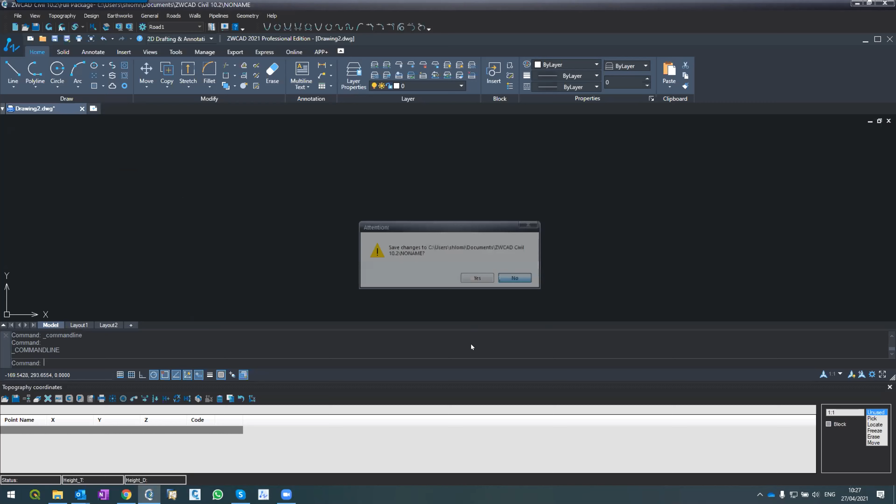And what we did, we started with a new project. Then in documents, we went into ZWCAD Civil 10, into samples, then to sample 7. Sorry, okay, new project, we opened a new project, it's my mistake. I opened a new folder and I'll call it Roads Design 2, and inside the folder I opened the project. Then we have our own project.

We've loaded a coordinates file. We do it here on the lower left button, we load the file of coordinates. What I did, I went into ZWCAD Civil 10, which sits in your documents, go to samples, go into sample 7, and read the file named sample 7 TCO, which is a coordinate file. Now I've gotten it here in the list. To see it, I press the refresh button, it's here on the top left. And I've gotten my map.

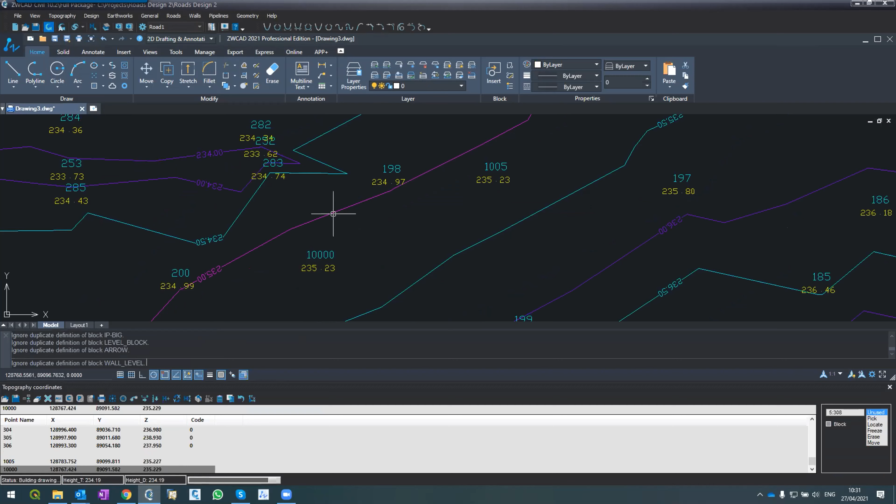Any question so far? I think this is quite simple. Let me continue. Now please bear with me.

Okay, it goes to roads. Every road starts with the horizontal alignment. It means the layout, how the road goes, the alignment of the road. All of us know that the best road is a straight line connecting point A to point B. So for example, if I want to create a road that goes from this point to this point.

Let me open a new layer and call it center line. It can have any name you want - I chose center line because center line usually refers to the center of the road, what describes the center of the road. I'll give it a color, red, or yellow, and make it the current layer.

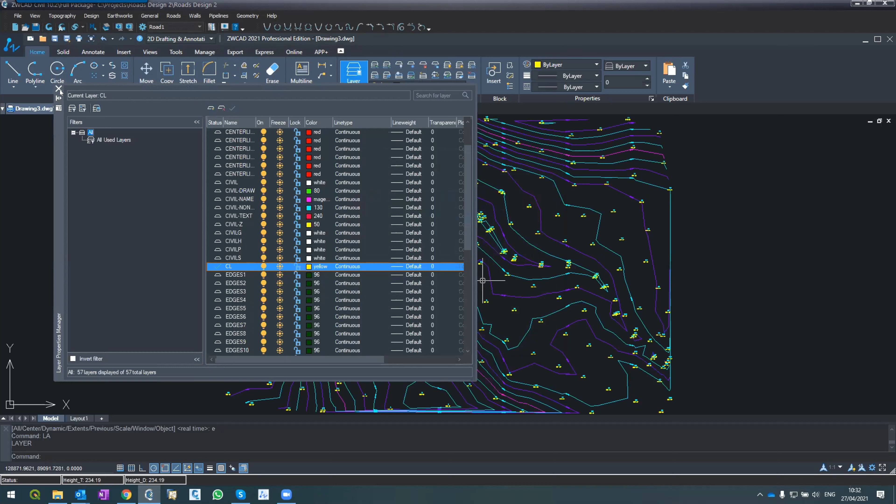If I want to connect this point to this point, I can do a straight line, right? So how do I do it? I do a polyline, standard polyline in AutoCAD or ZWCAD, from here to here. Obviously if I want to connect these two sides, this is the best road because it's the fastest.

But maybe Jimmy, can you tell me what is the problem with this road? Why shouldn't I go this way? Or what can be the problem with such a road? Any idea, Jimmy? No idea. Anyone else? Probably the cut and fill. Exactly, thank you very much.

Who was it, Nilo? Yeah, Nilo. Yes, thank you Nilo. Exactly, this is the problem. Because if I go straight like this, remember this is only the center line - the road will go wider, like 5 meters here plus 3.5 meters like this and 1.5 meters.

And then I will start cut and fill here. You see, there are contour lines here, there's a small hill here, and that's a problem. Now it depends - we can still go by this road, but then it means we are cutting here, or I can change my road and do another one.

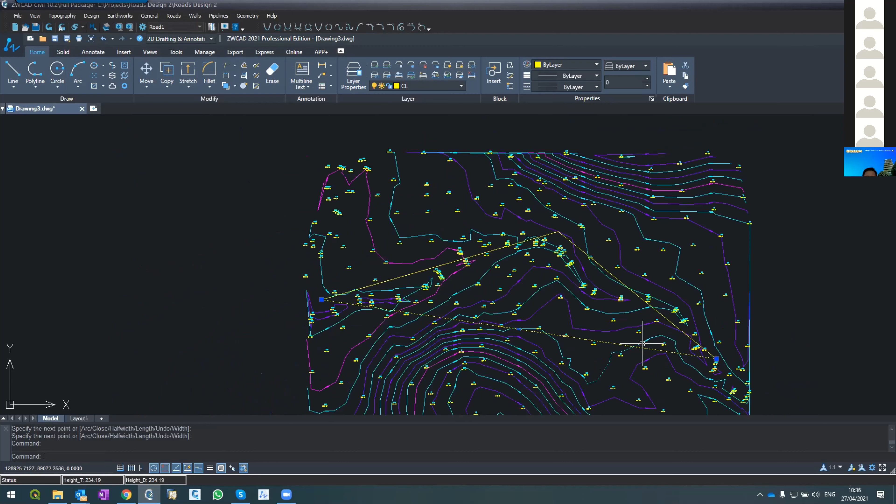If I want to drain to this direction, I will have a problem. I will have to put some kind of side ditch here, which is the solution. So drainage can affect our road design - definitely we want to go from high places to low places or whatever.

Another thing is a structure - let's say a house or plot. Let's create a plot, okay, just for an example. Let's make it white.

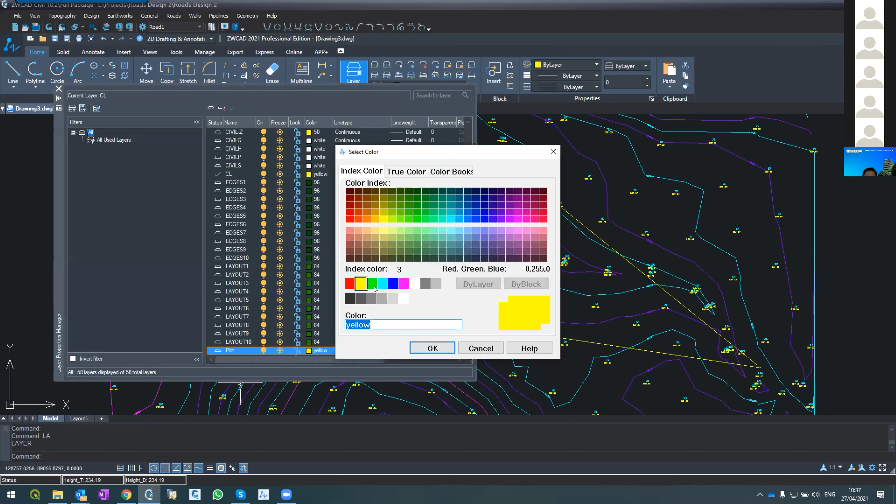I want to go in a straight line, but there is a house here, and another, not house, plots of private people here. So if I go through their plot, the owners will not allow me, or they will ask for big compensation.

Usually in many countries, the law does not allow owners to prevent roads going through their location, depending on physical planning. But if you go through a private property, you have to pay compensation, and the government pays it. This makes the project more expensive, and affects what we call statutory design. We have to redesign and come to a settlement with the owners, but we are going through their plots, and this can affect the alignment.

So I'm just giving you several examples of what can affect our road alignment. We talked about natural behavior, like earthworks and the effect on the environment. Parks and nature can affect it too - for example, if there's a national park here, they may not allow us to go through it. Private lands, other obstacles, maybe a big monument here that nobody will allow us to move, drainage, and so on and so forth. All this affects our alignment.

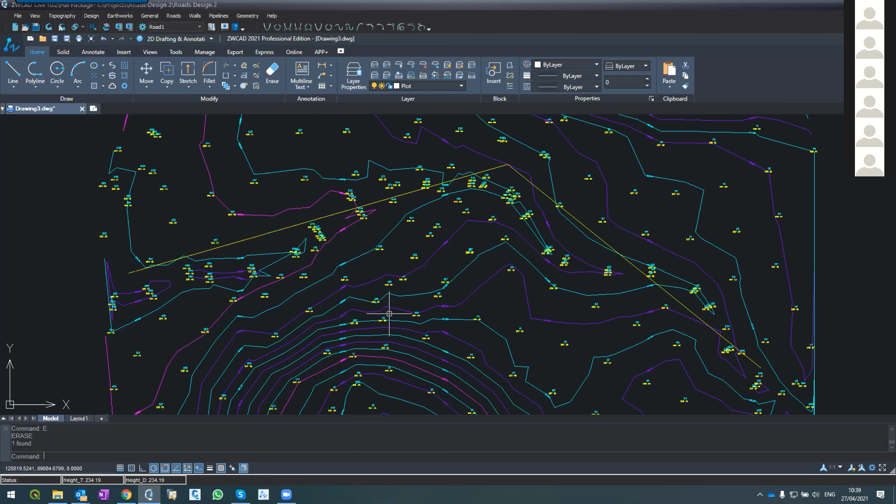So just for our example, let me design my road this way. So what I did, I created a polyline, but for now it's just a simple 2D polyline. To convert it into a road, I'm going to Roads, Horizontal Alignment.

See what happened - first of all, the list here below changed from topography to design. It says design coordinates, and I can flip between them. Go into topography, I see the topography. Go into design, I see the design. So I can flip between topography and design coordinates. On the right hand, I see the horizontal alignment window where I can define my road.

He asked me what is the road, the first road, road 1? I'm picking the select here on the right. See what happened in the command line - enter an option, polyline or segments. We will use polyline because we have a polyline here. So I press enter for the polyline. He asked me to select the object. I select the object - one object found - press enter.

See what happened now - the 3 coordinates that define this road, the first, second, and third, we call them IPs, intersection points. They appear both here, the coordinates, and the description of the road, IP 0, 1, and 2. If I press apply, we'll see the system converted this road, this polyline, into what we call a road element.

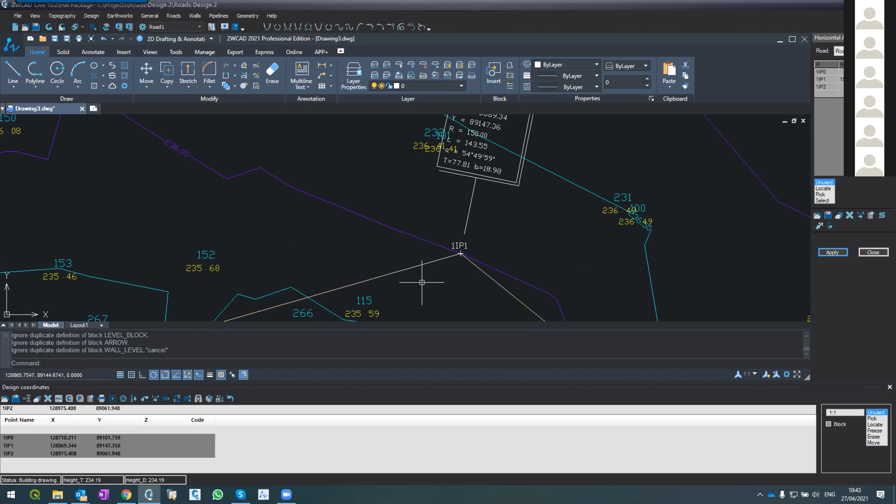See what happened - automatically the system used the 150 meter radius, and changed the road accordingly. So the starting point of the radius, we call it the tangent point - the tangent point between this straight line and this radius. The software calculated it to be here. How? It took the 150 meters, found how to fit it, and came up to this tangent point.

So from here we are starting - if you're driving a car, next time you drive, you'll notice that this is straight, and when you're going into the radius or turning right a little bit, this is the starting point. From here, what will happen? I don't know, Sheena, can you assume what will happen to the car starting from the radius? What will we feel? Any idea?

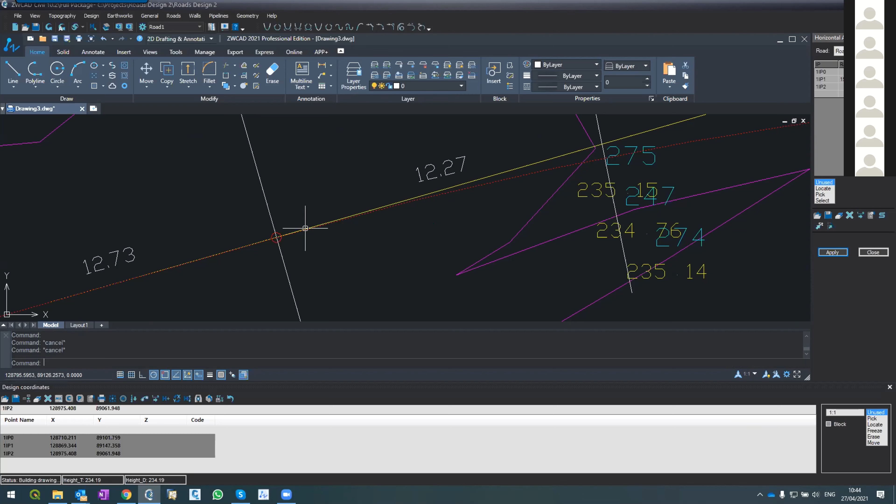Super elevation will be the implication, but what we feel is the centrifugal force - sorry, I said gravity, my mistake, it's centrifugal force. The car will feel it to the left if you're turning right. Centrifugal force pushes the car out of the circle, out of the radius. So if the car drives like this and starts turning right, let me show you something.

Let me do something, okay? This is my car. If this car is driving here, it drives like this, in this direction.

When it starts turning right here, there would be a force which will go this direction, right? It will start feeling the radius. The faster it will go, the bigger the radius. The bigger the radius, the lower the force.

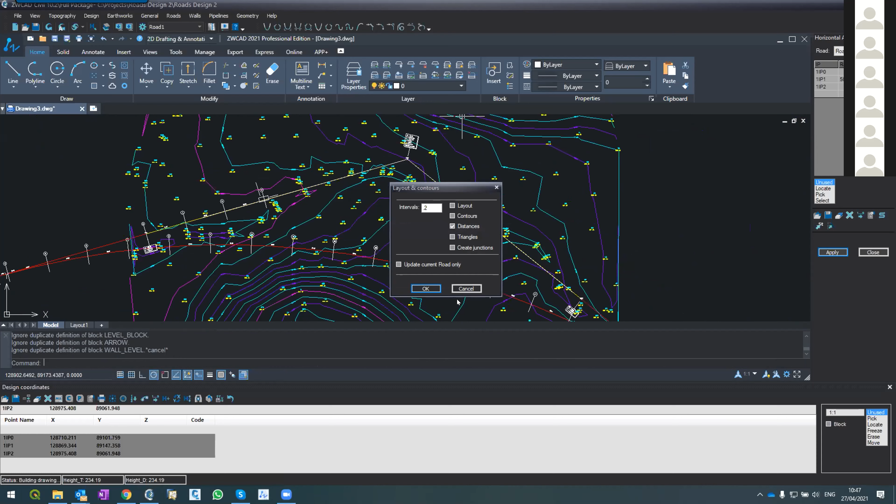On Road 1, there is an overlap. When I do 500 meters, it's too big - there's an overlap between this IP and this IP, and this IP and this IP. You'll see it in a minute. There's no geometric solution, so the system alerts you. See what happens - this is 500 meters, there's an overlap, so we cannot use it.

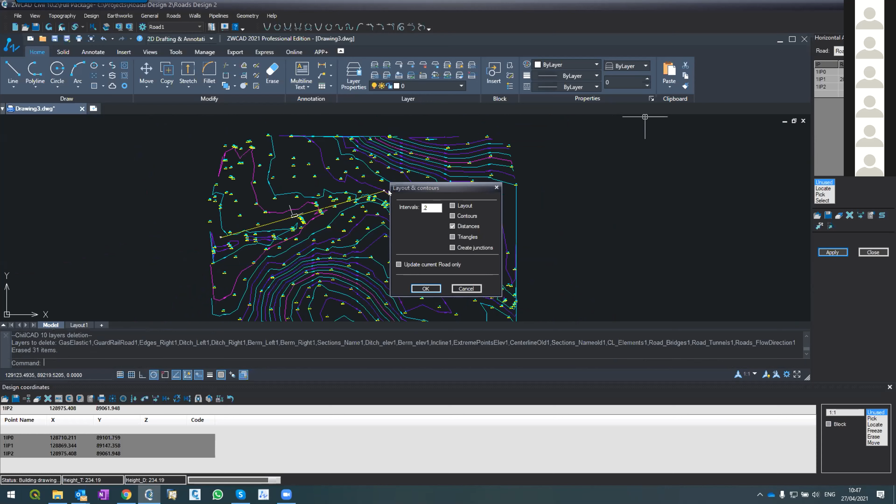So I'll go back to 200 meters. That means with 200 meters, the speed limit here would be maybe 70 kilometers per hour, depending on which standard we use. So I'll use 200. About super elevation, we'll talk about it in this lesson. Super elevation is the way to compensate for the centrifugal force by entering a crossing slope, but we'll see that very soon. I hope what I explained is clear.

So in short, when I click select here, select the polyline and press enter, I converted it into a beam - for now, a beam with horizontal alignment only. That means the data shows here, and that means I can enter a radius and change the radius of the road. This is what it means.

By the way, I have some additional information I can enter here. We call it transition curves, or in other words, clothoids. This is more likely to be shown on highways where the speed is very fast, and therefore a car that will go in this direction at 120 kilometers per hour - at this point, immediately the centrifugal force will be in full force on the car. So the effect on the driver will be fast and strong. So usually we smooth the transition.

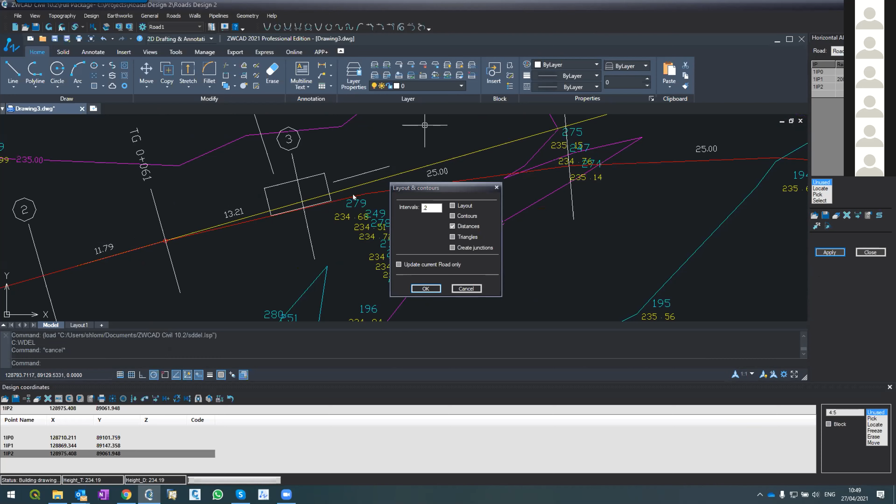For example, I can enter what we call a 40-meter transition here. Let's see if there's a geometric solution for it. Let's see it. Otherwise the software will alert. You see what happened?

Instead of a tangent, we have what we call a transition curve, a transition spiral. This is now not a regular curve, we call it a spiral, also called a clothoid. The clothoid is a geometric solution for a transition between this point and this point. We are transitioning the curve from here to here. What's unique about this element is that the radius here is 0, or infinity if you like - it's the same. So there's no centrifugal force.

Here it starts changing - at each point like this, the radius is getting bigger. Here it will be 200, here it will be 0. And the clothoid's geometric definition is that it transitions slowly, gradually, from 0 to 200. So the driver will feel that the change is not that dramatic. This is why we create transition curves.

I hope you got it. What the software shows you is that the TS is the tangent from here to the spiral, and here from the spiral into the curve. And here again, usually when we do a transition, we do the same when we're going this way, so I'll put 40 here as well and press apply.

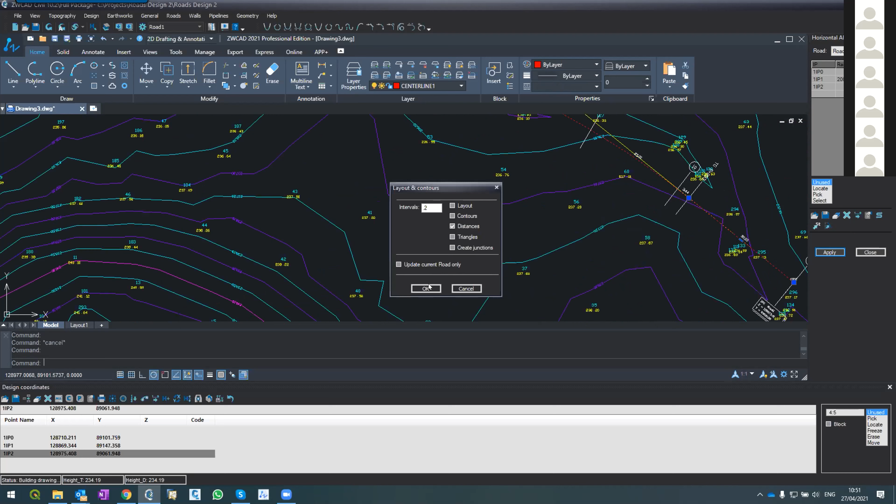Now I'll get the same thing here. Okay, so I have a spiral from here to here. I hope this is clear. Any question about this one?

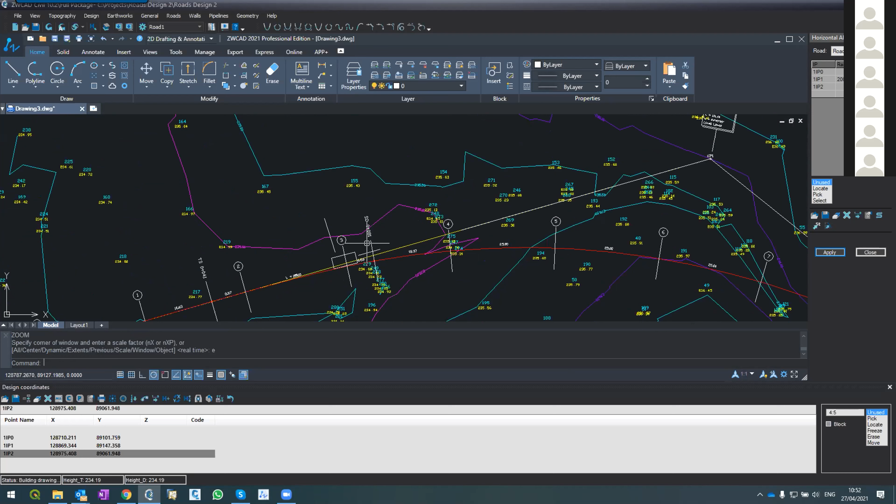Any questions about this one? No questions, I assume the silence means no questions. Nilo, can you follow? Yes. Hatik, can you follow? My question is, can I follow? Hello? Yes, I can follow. Okay, who asked the question? Jimmy? Yes, please, Jimmy.

We can still design our road without a transition curve, right? If we are following just the radius without the transition values. Of course we can, but it has implications.

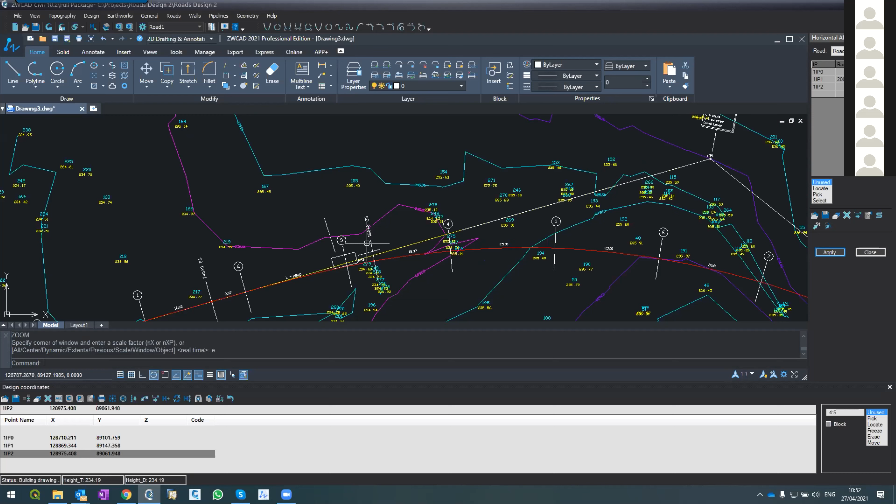Again, it depends on the speed limit on the road. If it's an urban road with slow speed, let's say 80 km/h, then usually we don't use it. It depends, we can use it or not use it. The reasons for not using a transition curve, let me give you some ideas.

One reason is it's more difficult to construct, because the spiral curve itself is not a linear definition. Second, it probably affects our geometry. We talked before about the limitation of the geometry, for example the preference to have a straight line instead of a curve from the first place, so this also limits the geometry.

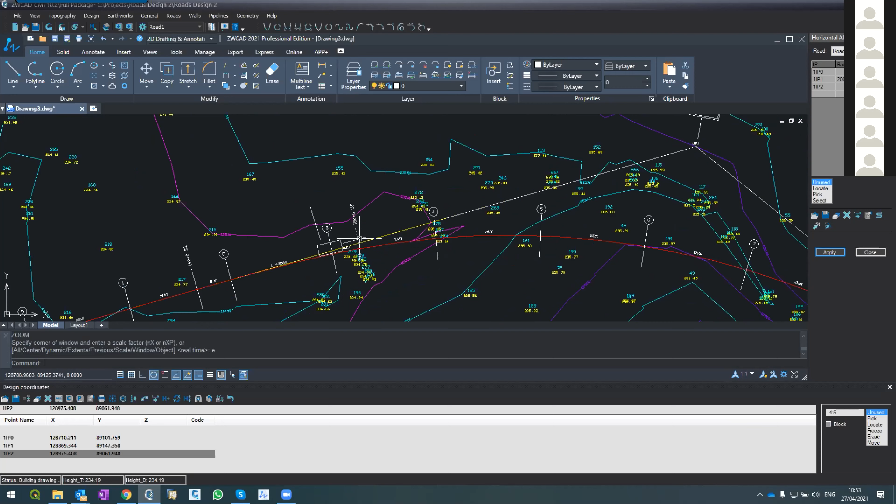So usually these are two reasons, maybe others, that limit us from putting in a transition curve, and then we use standard radius. But in highways where the speed is very fast, and you enter the radius again, for example if this would be a curve on a highway with a speed limit of 120 km/h...

Usually we put a transition curve. But if the radius would be, for example, 5,000, then the centrifugal force on the car will not be that much, so the importance of the transition is not that critical.

But again, I'm talking about road design, and I'm trying to limit myself now to the software and not to general civil engineering. More things about the software.

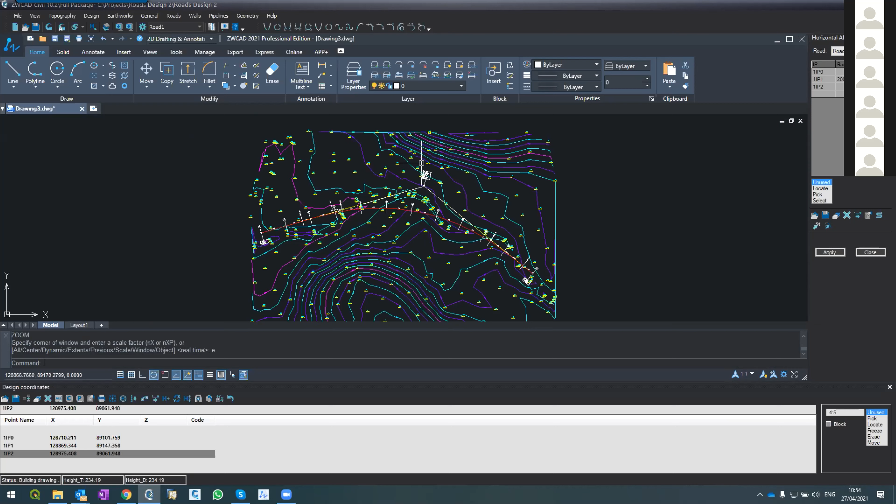Whenever we design the road, the software shows me more data here: the X, Y coordinates, the radius, the length of spiral if I have one. It shows me L, the length, I think from here to the tangent. I think this distance is 150, as far as I remember.

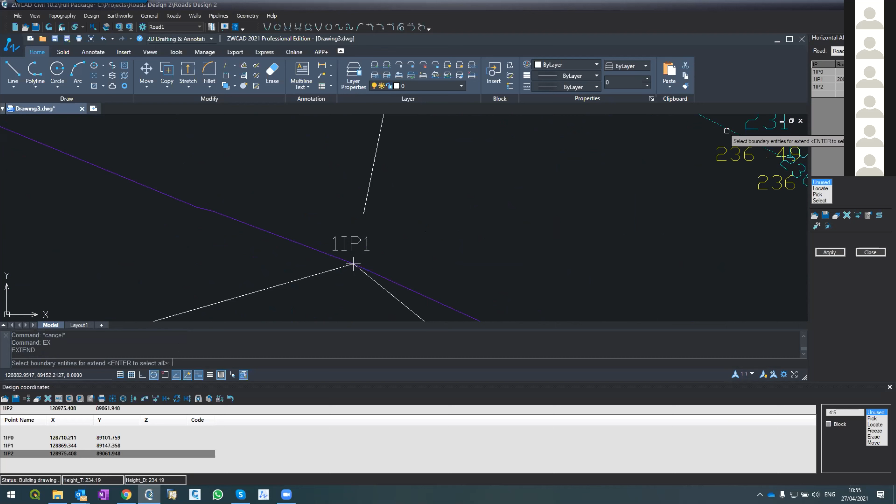And it shows me the transition angle, which is created here. If I would extend this, this is the turning angle. So here the angle is 54 degrees.

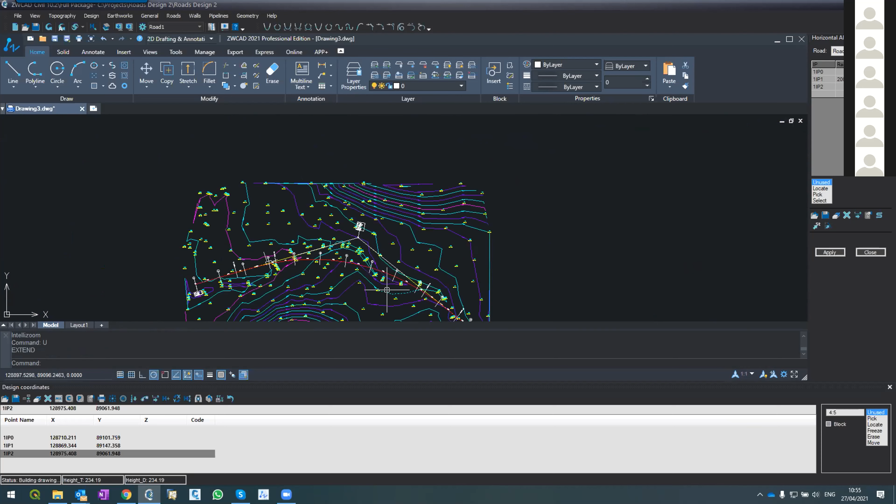These are data for the road. What else? It's too much graphic, let me go into layers and civil settings to simplify, so I don't need the points. If I go to options, I have many definitions here, one of which is to change the display.

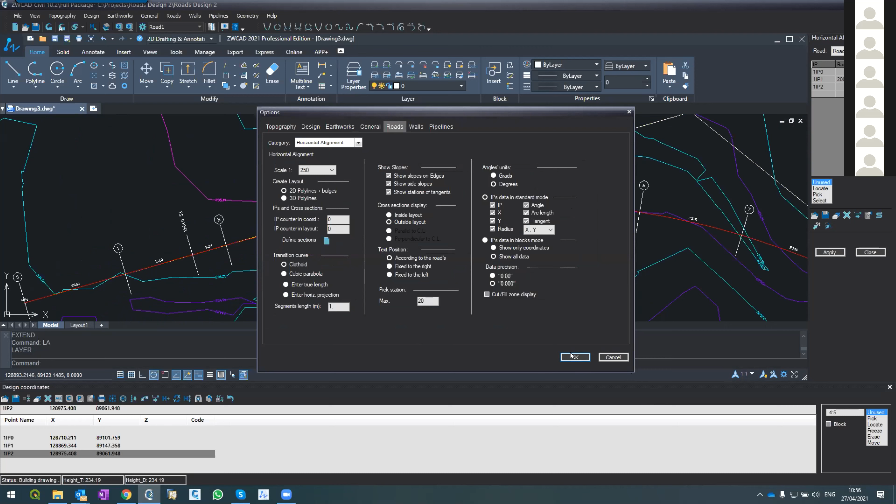Instead of having the road shown as 0, 1, 2, 3, 4, if I go to define sections and change the format from format 1 to format 2, press OK, OK again, and apply, you can see that now, instead of numbers, I see the running distance of the cross section: 50, 75, 100, 125, and so on. It's a matter of how you want to display it, there's no one standard for it.

How do you want to create this road, the center line, as a 2D polyline with bulges like we saw, or a 3D polyline? There are advantages to both: 2D elements are easier to cut, trim, and edit, but a 3D polyline will show me the road in 3D if we change it, so you can choose.

Remember the transition, now we're using clothoid. We can also enter cubic parabola. Why use cubic parabola depends on countries and regulations and so on. There are many options, I'm not going to talk about all of them, but it's important to know they exist.

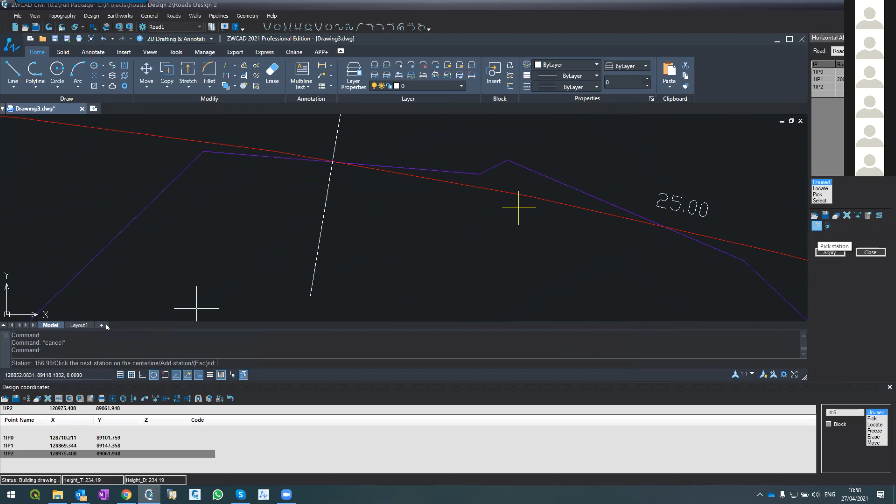Another thing, for example, this button. I can click this button and click here, and the software shows me that this point, the projection or perpendicular point on the road, is at a running distance of 156.99 from the beginning of the road. So if I want to measure the running distance at a specific point, I can do that.

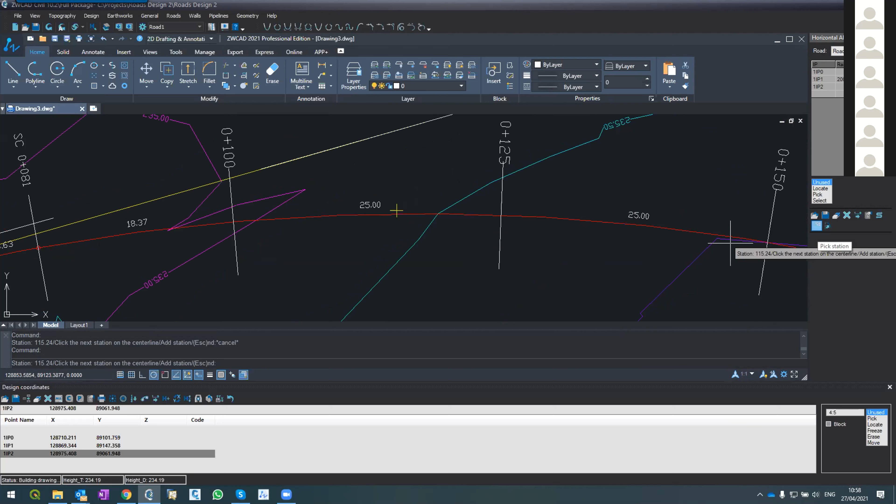Click here, this is 115. You see, this is 100, this is 125, this is 115.24. So I have many tricks here, though it's not that important at this stage.

If I take the original polyline, the CL, and change it, nothing will happen because the system doesn't know unless I reselect. Let me go select, enter, and select this. But see what happened? All the rest definition changed, so I'll have to re-enter them.

What was it, 200 and 40 and 40.

Oh, you see what happened? Since the curve is bigger, there's an overlap. The 200 cannot fit. So let's do a transition, maybe 20 meters, just for... you know what, not transition. Let's see what happens now.

Still 7 meter transition. So I'll use this to set 180. Yeah, now it's okay.

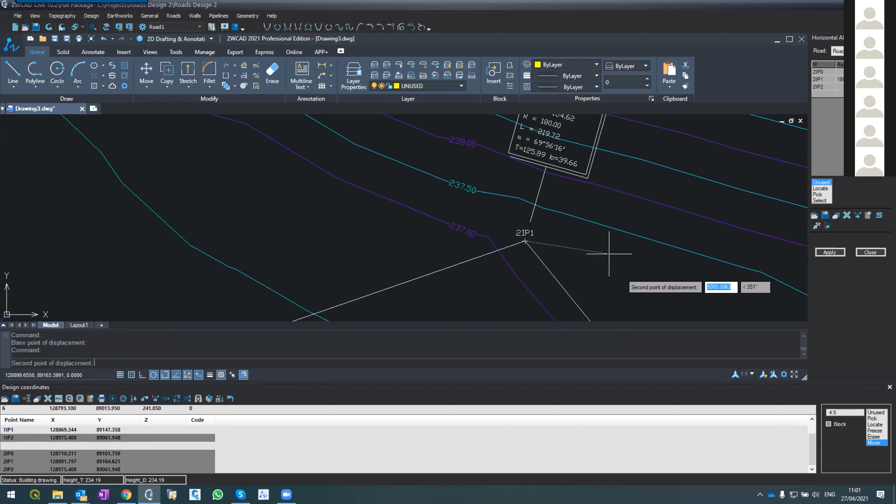The software asks, what is the base point of displacement? I said from this point. And what do you want to move to? Let me move here, can use object snap, whatever, but let me just move it here. See what happened.

The software now thinks, one second, and recalculates... one IP, sorry, recalculates these IP coordinates. These IP coordinates change to this location.

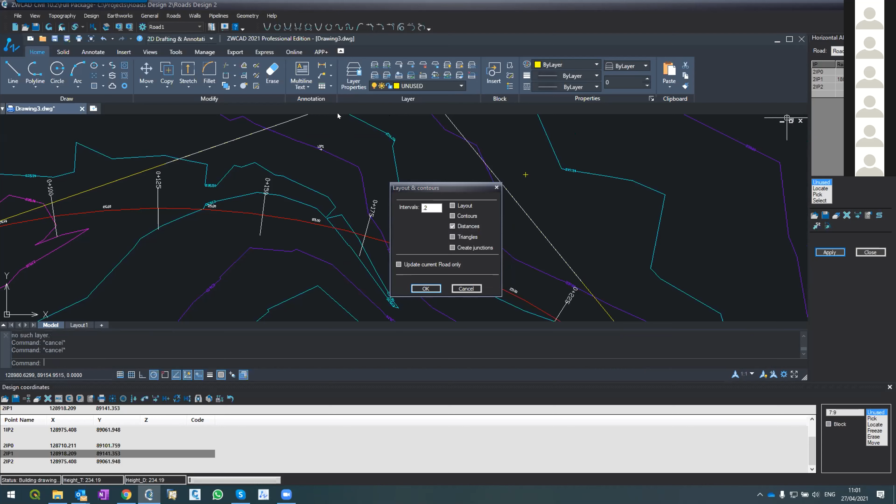If I go to the right and press apply, and apply again, automatically the beam has been updated. But again, we have the radius, the overlap problem, because this new geometry created new challenges. We'll fix it in a minute, but just so you can see.

See what happened? I changed it to here. I don't need this polyline anymore. Now I'm using move to change the coordinates here, and the beam automatically updated accordingly. See? This is the overlap which we saw.

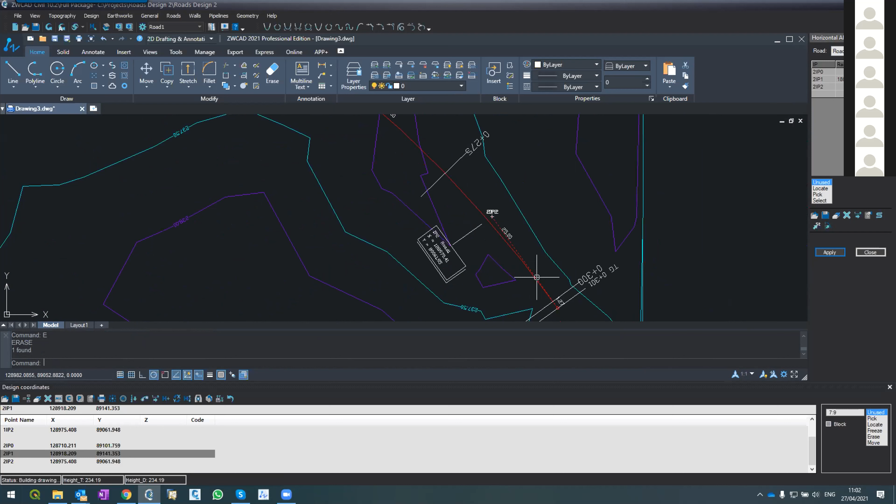So let's change it now to 150, maybe it will be enough. Let's see, actually the software will tell me. Yeah, it's enough.

Okay, any questions so far? Any questions so far, guys? Because I finished with horizontal alignment and I'm moving to the next thing. Sheena, can you follow? Yes. Don't you have any question? No questions. Okay, okay.

Before I continue, I want all of you to take like 10 minutes and do the same practice. It's very simple, what I want you to do I will write down in the chat. So all of you: one, start a new project and name it road 2. You can put it in a folder, put it in a new folder.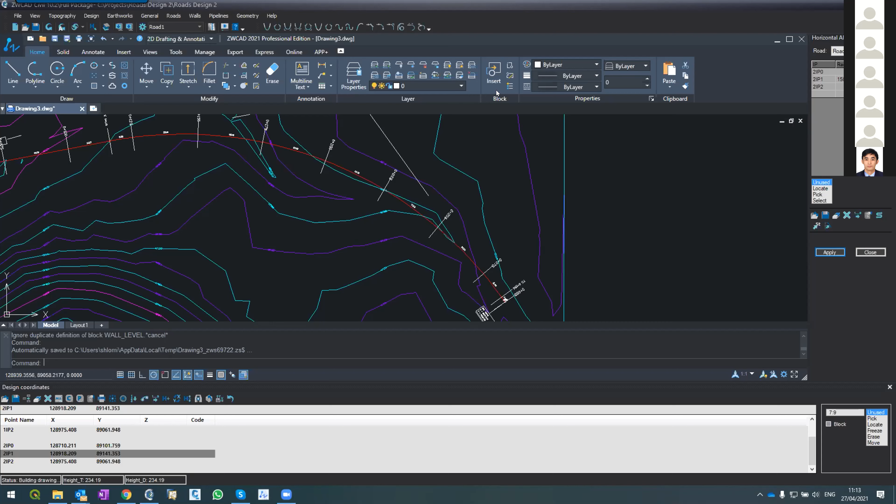Yes, I have a problem, I don't know the course. Let me share my screen. Because all of us should learn, I want to see it easy on my screen because I'm doing it perfectly.

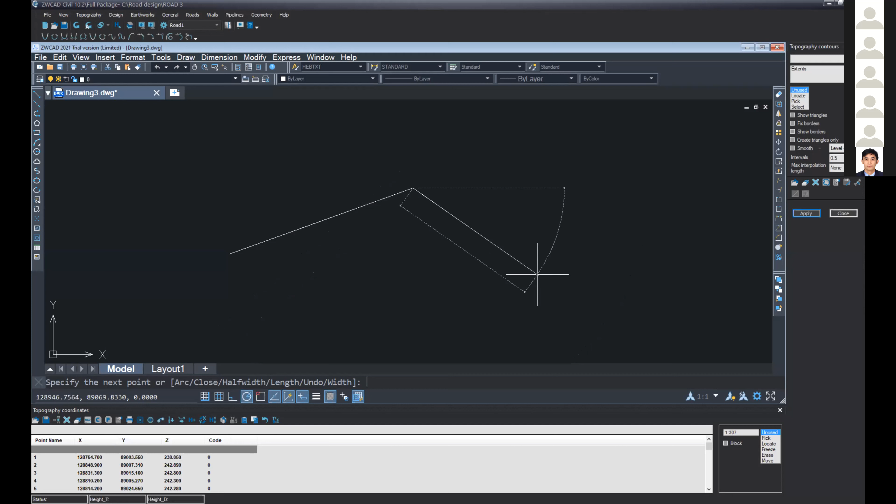Where is your contour line? Where are your contours, the contour lines? How to draw the polyline, the road, then it disappears.

Can you? Okay, one second. Somehow your point disappeared. The contour lines, the contour lines. What about your points? Yes, everything.

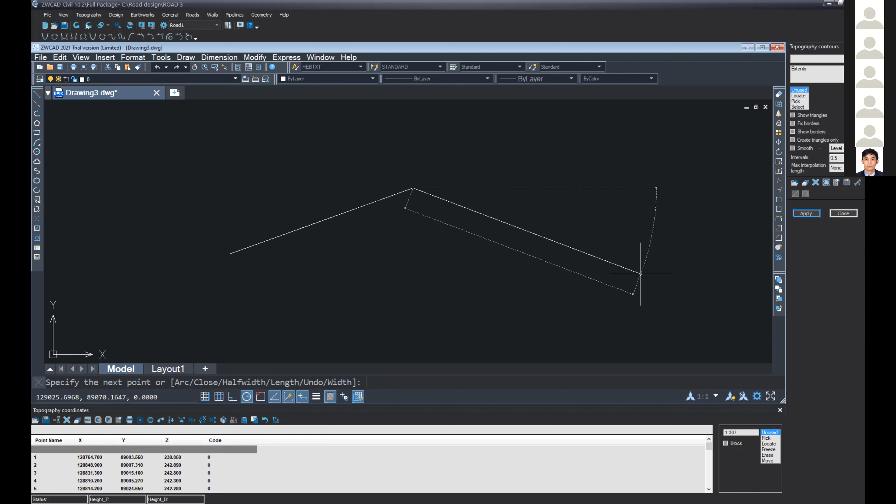Okay, let's do like this. Press escape, go to one of the points below, click on it. Now go to the first one, you see that the point is now in the editing row, the point itself. Yes, above is the editing row. No, below? Yes, okay.

Go to the end and enter a space, or go to the one and change it, remove the one, and do something to show the system that you have done a change. Remove one and enter one again. I've done that, and enter one again. What you did right now, if you refresh, the system will think there is a change and refresh the layer. Oh, the contour line is back.

Okay, one second, there's a delay, we don't see. Okay, you see what happened? So I don't know why they disappeared, but if you want to make the system refresh or recreate the layer, if you just press refresh, the system will not know you have a problem. So you have to tell the software you changed something in the list, then refresh, and automatically the system knows there is a change in the list. I need to recreate the layers.

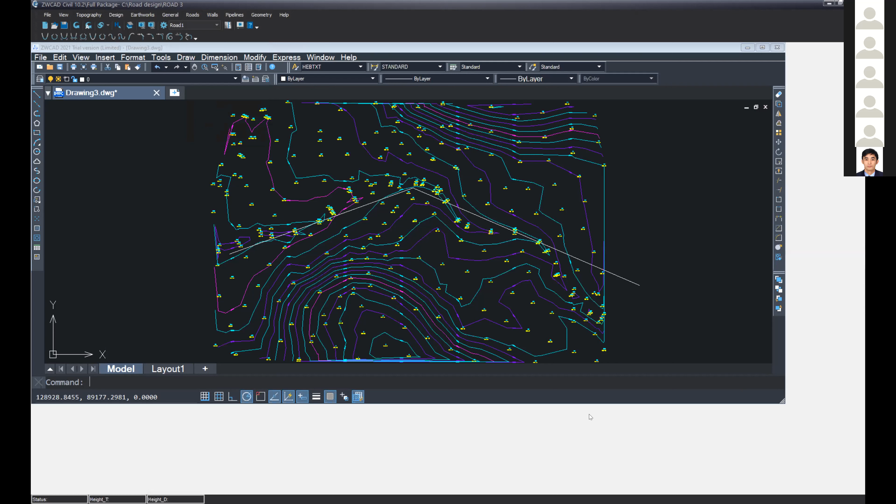Yes, Atike, can you share your screen? Atike, can you share your screen? Better not, because my ZWCAD Civil has locked, so everything is gone. Can you show me? I want to see. Okay, and say locked, we try to understand what's going on.

Maybe we'll learn together. Sorry. Can you see now, can you see my screen? Yes, I have already imported the coordinates now.

Good, continue, I'm at that position. But I can't see now. Okay, you see, you have the same problem. Yeah, first of all try to zoom extend. In the command line, zoom to extend. Command line, zoom to extend. You know how to zoom to extend, right? Zoom, yes, enter, E, enter.

E. Excellent, yes, it's Turkish, you know. Turkish, yeah. Just zoom to extend, maybe do it from the buttons, whatever you want.

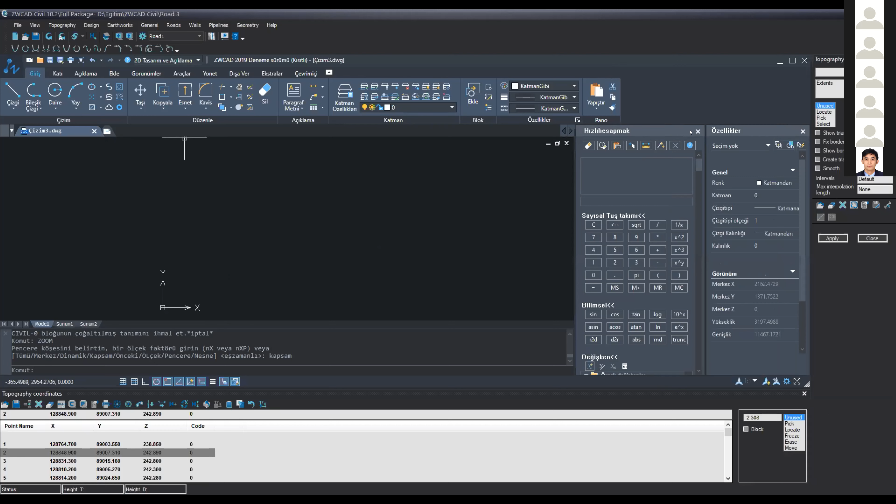Okay, no? Perfect, done. So nothing on your points, very strange, very strange. You know what you can do? Maybe I can go to number 2, for example, in the list below. Yeah, and you see you have a button with a target that shows a target. This one, yes. This is where the point was supposed to be, but it's not showing.

Okay, try to create contours, let's see what will happen now. And at that point, it's locked. I see, okay. This is one of the things that maybe we'll ask our technical team to have a look, because I think it has something to do with the language, I'm almost sure.

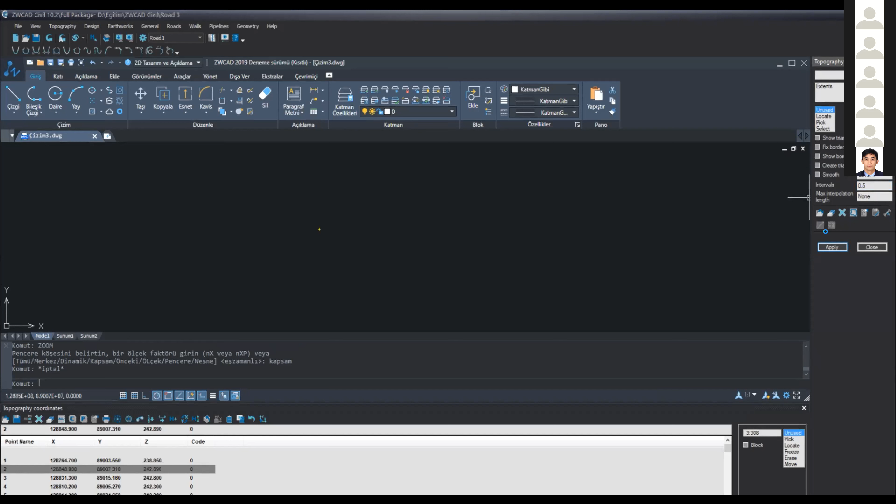It's conflicting with the language, so it's something we can sort out, but we need to take control, maybe later on. Okay, yeah, okay, we can take it later. This is the first time it's happening, or has it happened to you in the past as well? Yes, in the past I have the same issue lots of times. Okay, okay, it's an issue of the Turkish version, so we'll have a look and sort it out. Okay? Okay, thanks.

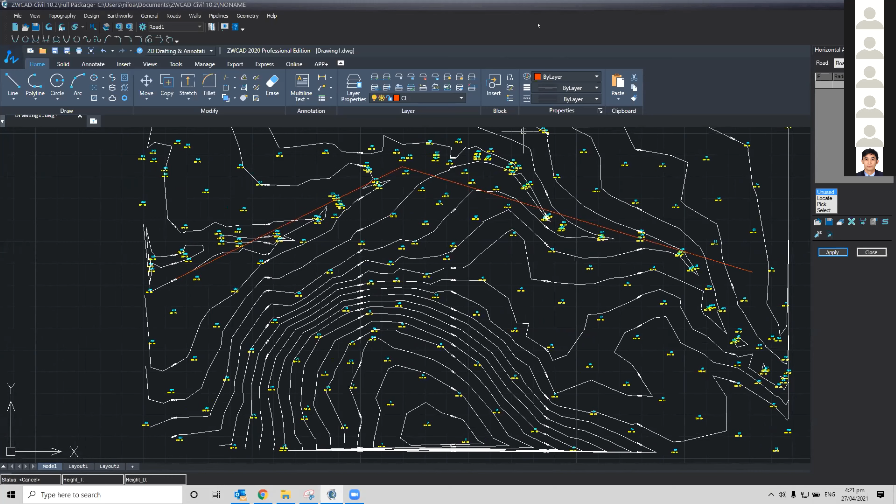Okay, anyone else? Sheena, how are you? Yes, hello. Can you share your screen? Okay.

Can you see my screen? One second, I see something. Yes, I can. Oh, perfect. So I think you are okay. Okay, thank you. You didn't encounter any problems? Okay, yes, no.

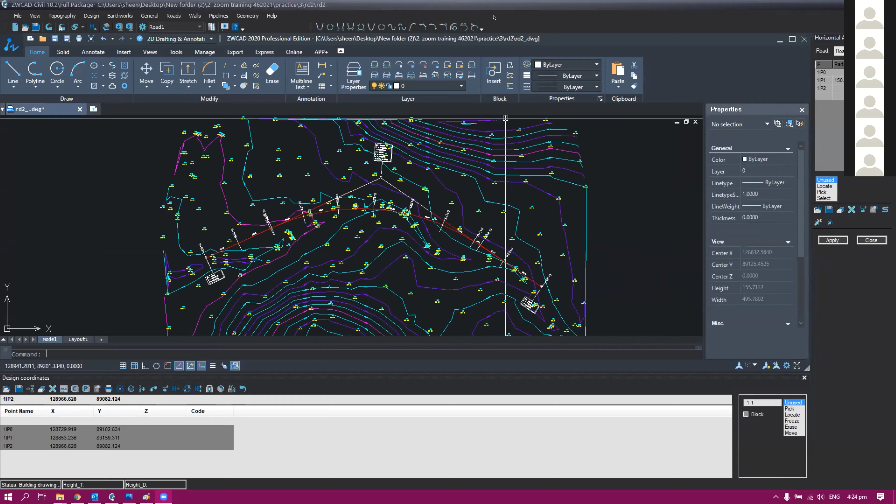Nilo, I think you should use Control+9. Control+9, I think it's supposed to restore your command line. Wait. Yeah, Control 9. Yes, no. Are you sure? Are you sure that your focus is in the drawing? Yep.

Because it works on my computer. Control 9, not Control Function 9. Control 9. Okay, okay, does that work?

It's been minimized, that's why I can't see it. Yeah, do you want to share? Can you share your screen? I'm sharing my screen, yeah. Okay, good, you have the command line.

Very good. Okay, so make it a little smaller, the command line, so it won't take much space. And go to design, sorry, roads, horizontal alignment.

Okay, wait. Good, then select. Select, right? Yes, select. And, oh, where is your command line? It disappeared again. Huh, press escape and then Control 9. It's very strange. Did you press Control 9?

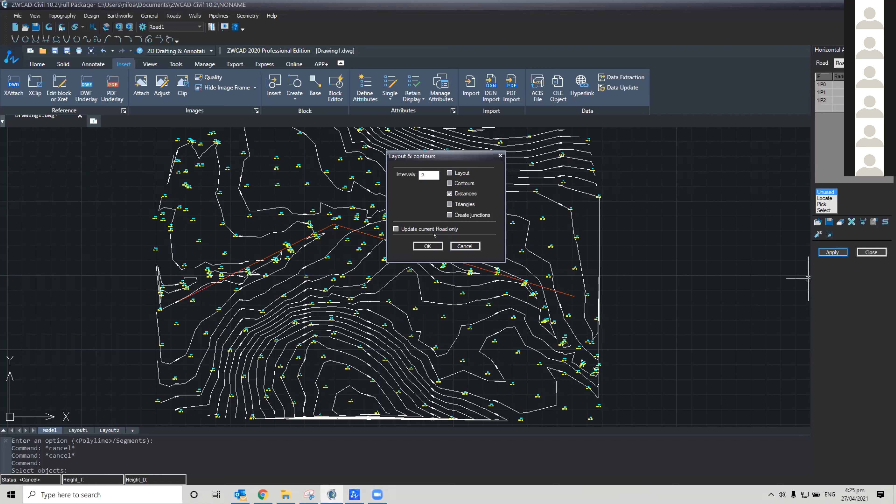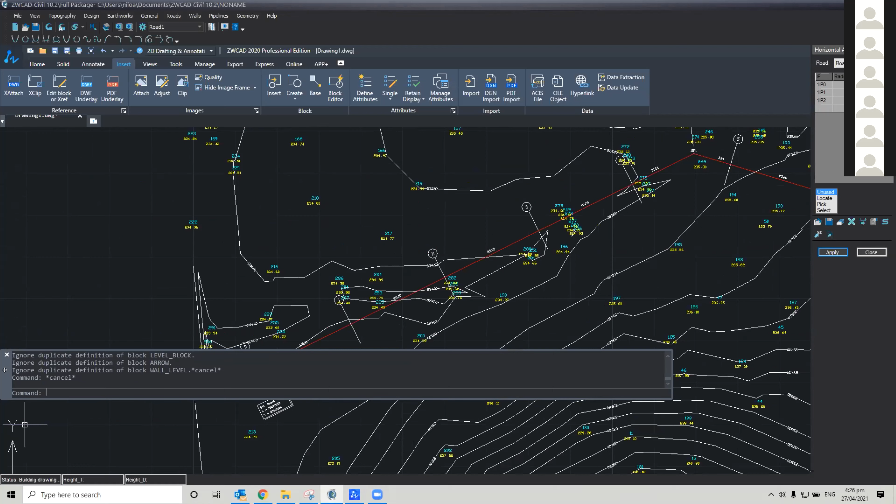Now, what I would advise later on, I think it's something connected with the docking of the command line. So when we finish, try to see how you can dock it. Yeah, okay, it's something about docking the command line somehow. Okay, but if the problem persists, let us know.

Change the entry radius, let's say 100 meters. Then how about the curve? No, no need for spiral transition curve. No need. Okay.

Hey, there you go. Okay, good, this is all right. Go to options and change it. Yeah, on the right, you have a button, options, the one with the hand holding a paper.

Oh, where is it? Yeah, where you are, very close to where you are. Now, first row, and another one to the right, another one to the right. More. Yeah, okay. And go to define sections.

You see the button? Define sections, this one. Yes. And change from format 1 to format 2.

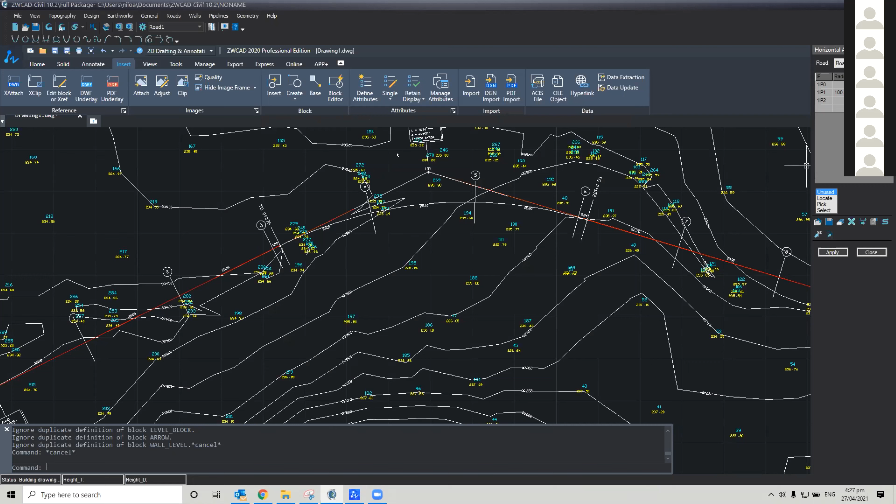What's the difference between the two? Okay, format 1 is when we see serial number. Format 2 is when we see running distance. Okay. Yeah, press OK, and apply the change. Apply. Yeah, let's see.

Good, okay. One of the problems is that you are now working on 'no name'. See on the top, you see that you are in project 'no name'? Yeah, oh okay, it was a mistake. So what you do now is go to File, Save As.

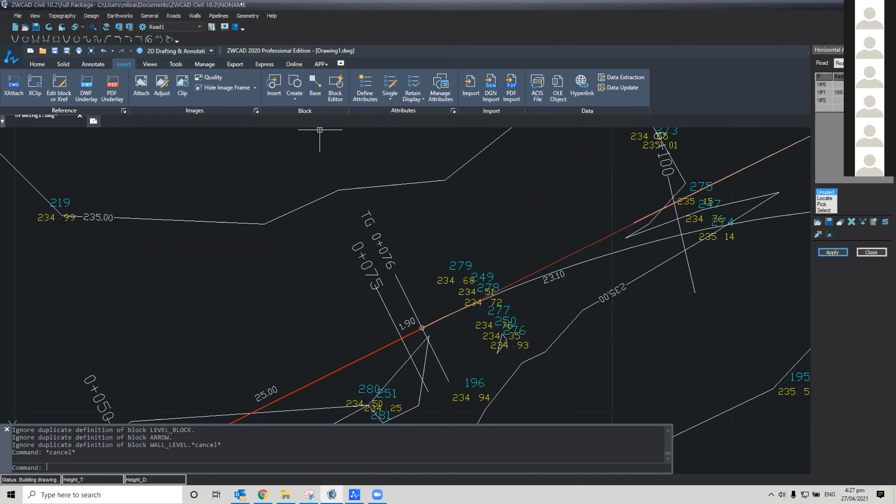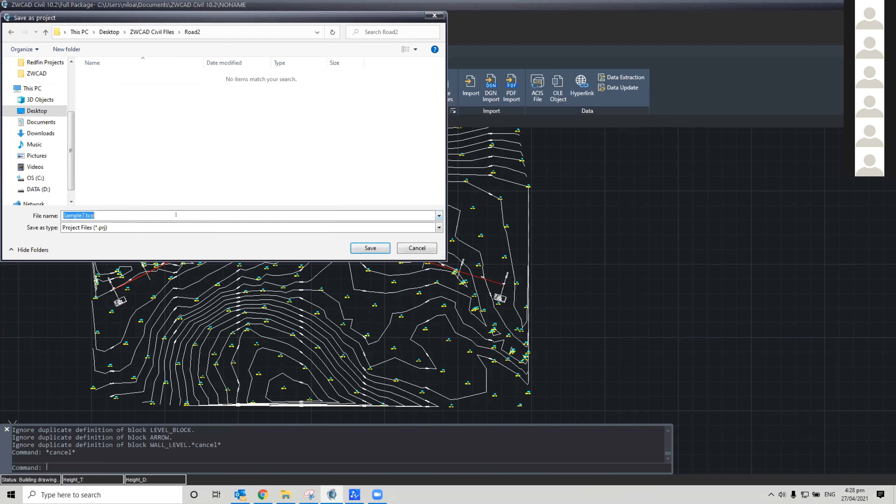And save it somewhere, maybe. Road 2, right? Road 2, usually I create subfolders. Yeah, Road 2, and Road 2, and I'll save.

Now all of us are on the same page. You are also on the same page. I said Gian has the same problem like you with the command line.

What I would advise you to do is two things. First of all, try to see if you can dock the command line. And the second thing is, you can use 2021. There shouldn't be any problem. All our training we do with 2021.

So what can happen, maybe, I want to show you all something, to remind you of something. Someone needs to mute. Okay, I want to show you something. You might have seen this - do you see my screen, all of you? Yes, I can see. Okay, thanks.

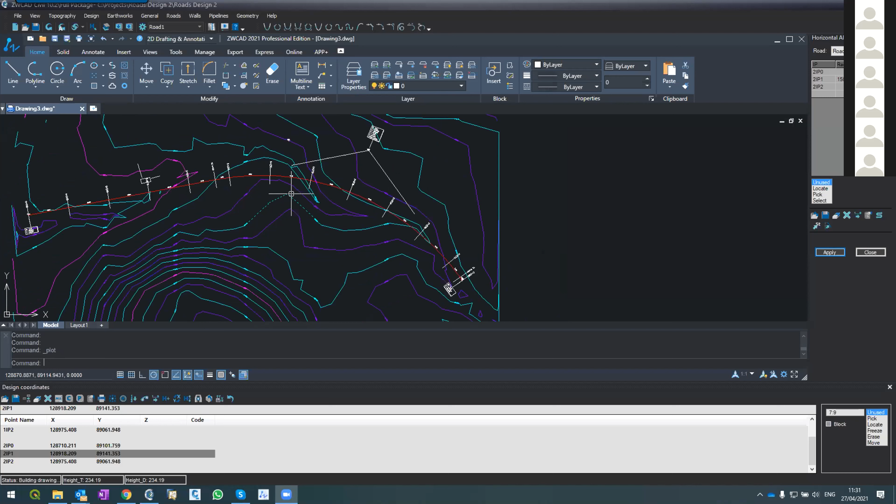If you have two systems installed on your computer, 2020 and 21 for example, and you want to choose which system to use, I want to remind you: go to File, open Prototype. In Prototype, go to File, Configuration. We studied it in the first lesson.

Here we have to tell the software which ZWCAD version to use. So it might be that before you had 2021 installed, but here it was set differently. Then the software didn't know how to work with it. So you have to tell the software which ZWCAD version you use. Usually the ZWCAD Civil has a system to automatically detect which kind of ZWCAD you use.

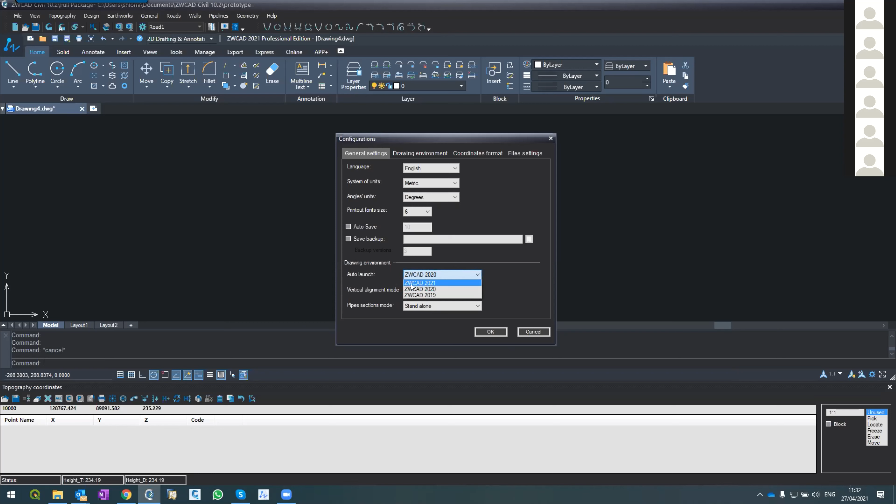But if it does not detect automatically, this is the way to do it - you detect from here. Go to File, open the prototype, go to File, Configuration, and change here from 20 to 21, for example, like I do. Press OK, and then you have to exit and save.

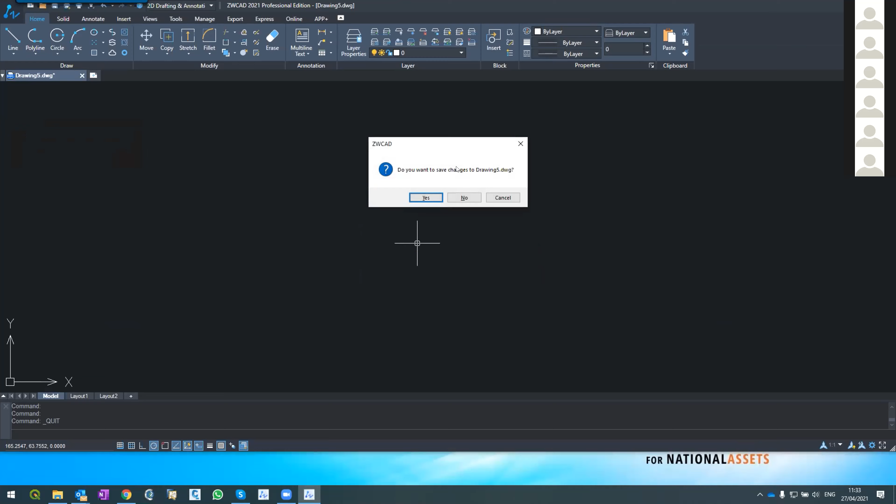Now you've changed something in the system configuration in the prototype. So next time you launch your system, it will automatically launch the version that you configured in the prototype configuration. I hope this is clear.

Nilo, Gian, if you try this - work with 2021 and the command line - and the problem still exists, just write an email to me or use the WhatsApp group if you are part of my WhatsApp group. The ZWCAD WhatsApp group, just to show you, there's a group for technical matters.

Where is it? Yeah, this group.

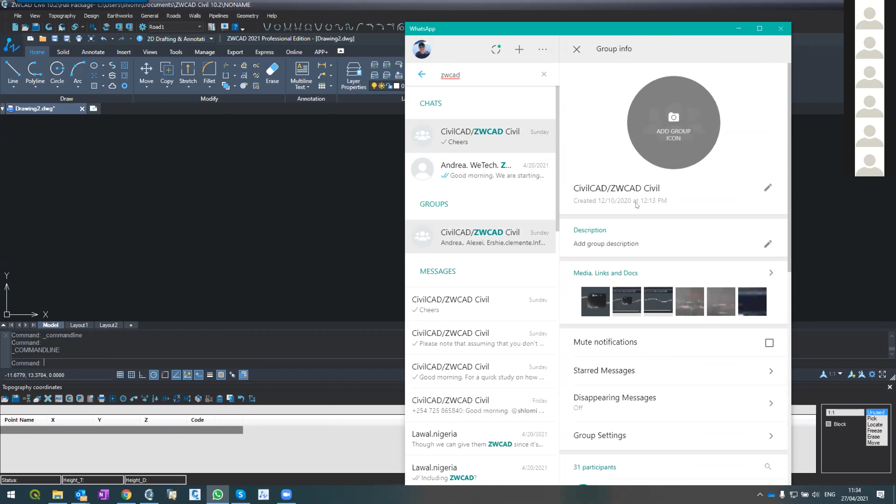And you don't need to reinstall, Nilo. You just have to try to do what I've shown you.

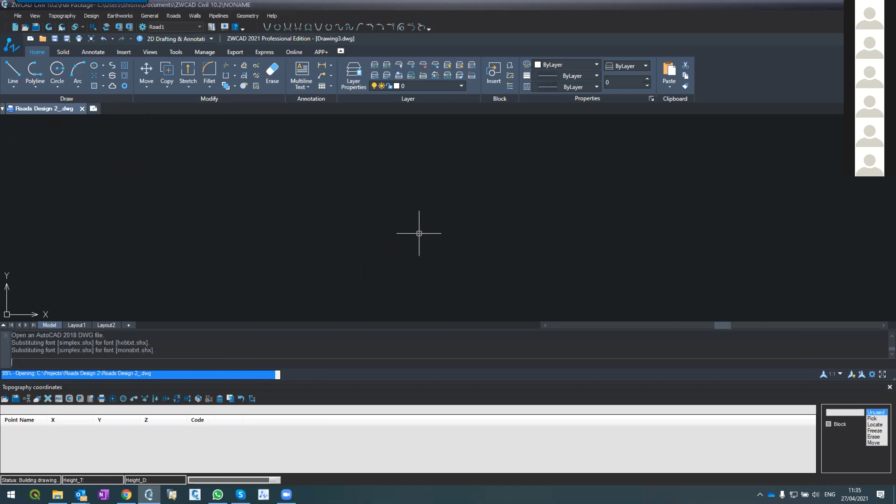But let's continue with our study. So we've been in road design, and we have the horizontal alignment. The next thing is to design the profile of the road, what we call vertical alignment. So we designed the horizontal; now we have to design the vertical alignment, the slopes of the road while you are driving. So I'm going to Roads, Vertical Alignment.

See what happened - the system automatically changed the menu, it's not the same menu. And also it changed and created another drawing. This is the first drawing, but now we are on the second drawing. The name of the drawing will always be 'road ver' - it's a temporary drawing.

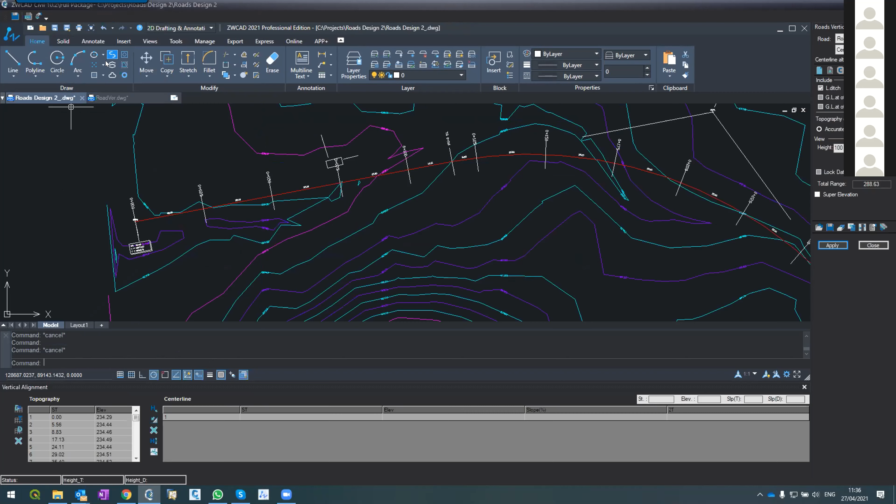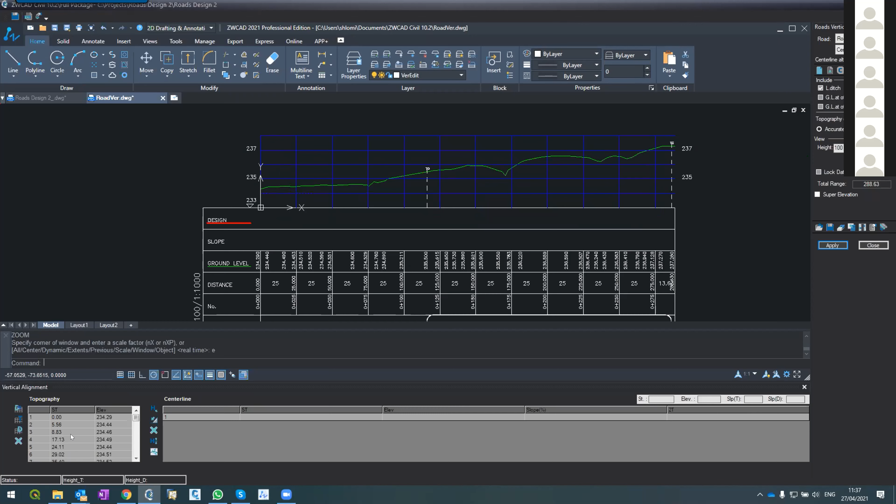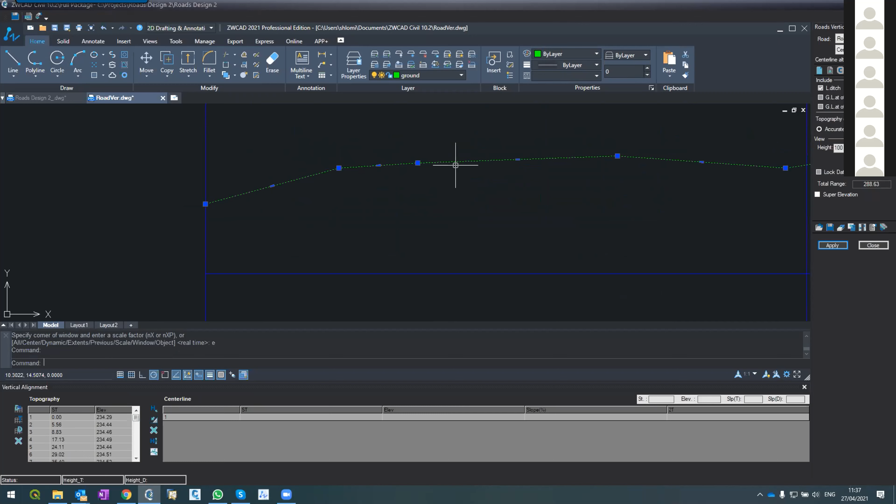In fact, the data of the profile that the system cut is the data that you see here. It means, in the beginning, station 0, this was the elevation. After 5.56 meters - I'm reading from here - there was a change in the surface, so the system automatically digitized a point. After 8.83, there was a change in the surface again, digitize the point. So all these changes in the surface were digitized one by one.

I hope this is clear.

Okay, so it was very simple. What I did: roads, vertical alignment, apply, and the system automatically cut the data, fill in the table on the upper lower left corner, and show me the drawing. If you don't see the drawing, go to zoom extends. Now let's continue with the design.

When I used to draw the horizontal alignment, I had to create my own layer, I called it center line. In the vertical alignment, it's different. You don't have to create your own layer. The system automatically creates a layer named ver edit, which is the only layer that you can design your profile. So let me design.

I'm starting from the beginning, using Polyline in this ver edit. I can start here, maybe in the ground, or a little bit higher. You can see this is 1 meter, each blue line like this in the grid: 233, 234, 235, 236, 7, 8, so on and so forth. So I will start here.

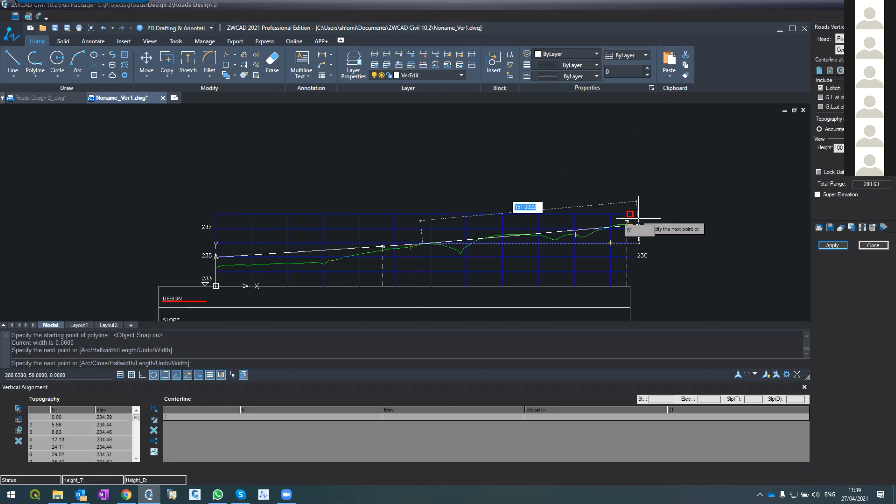I'm going with a straight line till I stick the ground here. Let's say here, let me see, I stick the ground. And from here, straight line, cutting a little bit. 237. This is my design.

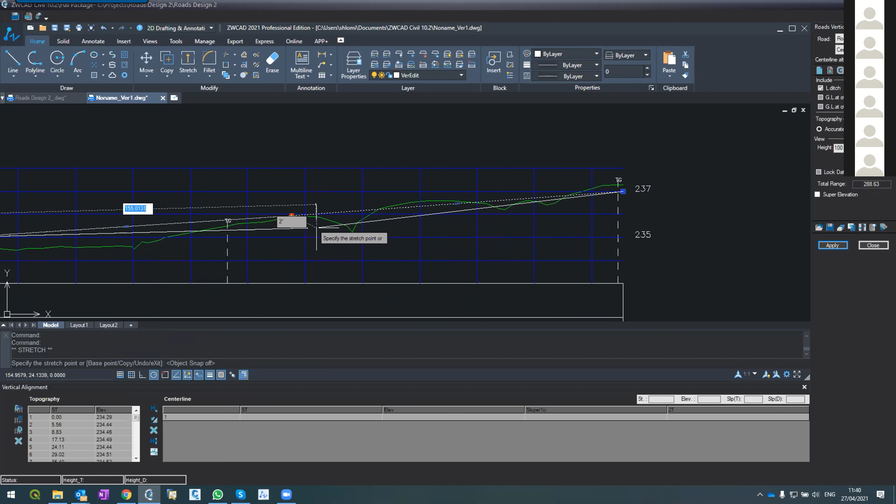Oh, it's almost a straight line. You know what, let me change it a little bit. Here I'll stretch it. Let me remove the objects now, to here, and I press apply.

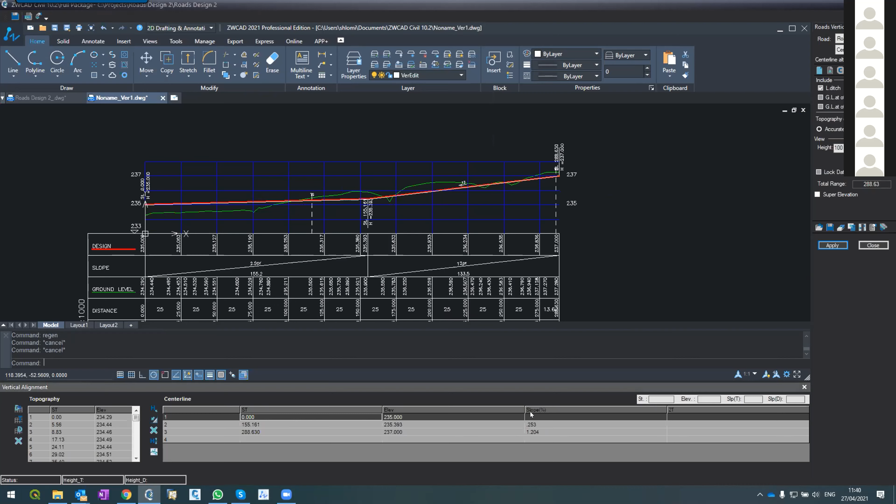See what happened? When you press apply, the system scans your drawing, scans the layer ver edit, and scans the polyline that sits in this layer, and converts this polyline into this table below, which is running distance and elevation, and of course the slope. So the system recognized that there are three vertices: one here in the beginning, at zero, at the beginning of the road, and the elevation was 235.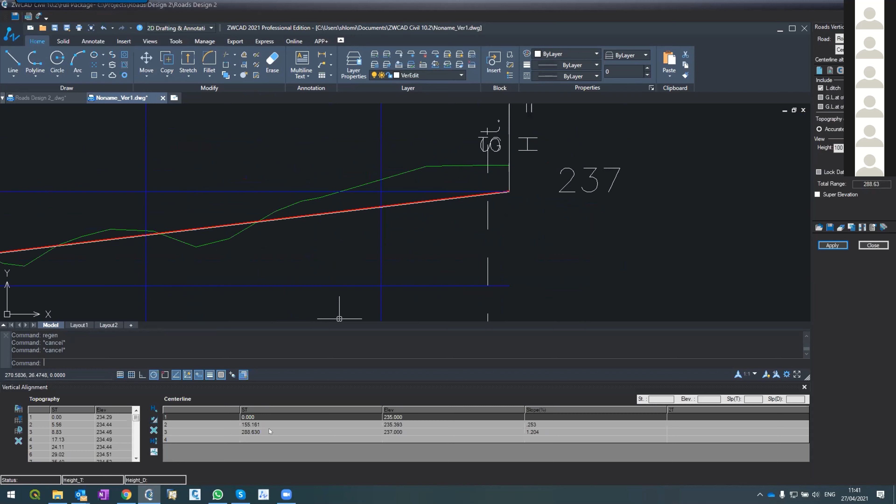You remember, I used object snap. Another one here, after 155.161 meter, with the elevation of 235.393. And another one going here, after 288.63, with this elevation.

And accordingly, the system calculates the slopes, which is a very small slope, 0.2%. So that is 20 cm different on each 100 meter, which is very small. I doubt that even the water can flow in this direction.

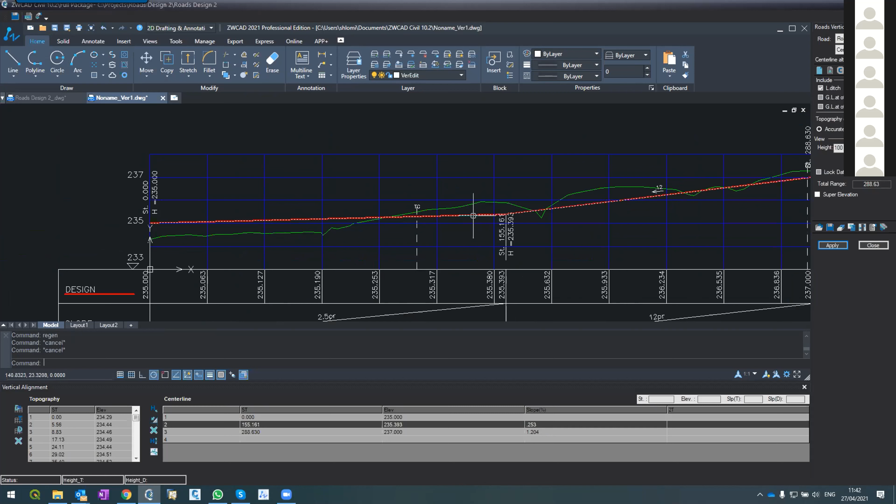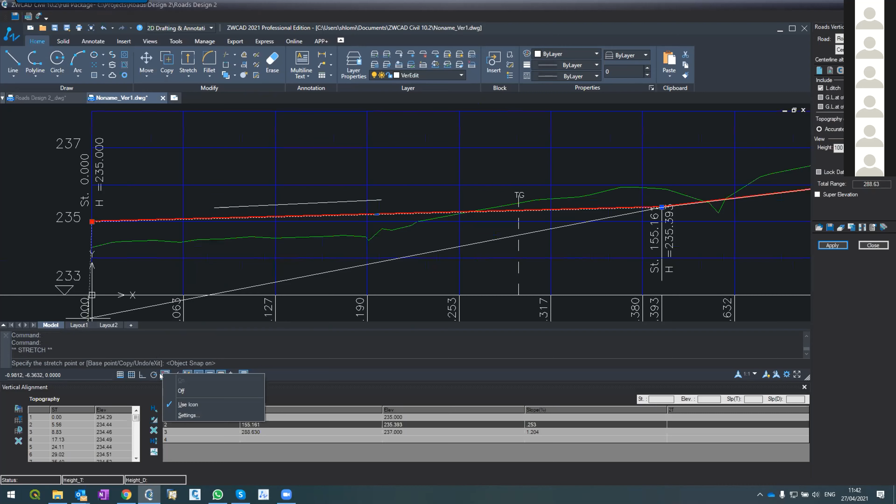If I want to change it, because my fear is that the water will not be able to flow. It's supposed to flow this way, right? Because it's very, very shallow, small radius, or small slope. What I can do is take this one and remove it. Maybe let me use the object snap and use the nearest.

Here, let's see what happened, let's apply. Apply. See, oh, I probably did several—okay, somehow my polyline, maybe I entered more. So let me remove this one and this one, I'm not happy with them.

How to remove? I can change the polyline, or I can go to the table: click on this line, go to the serial number, stand on the serial number, and press delete on my keyboard. And the same to this vertex. Let's press apply. See, it changed. Now the slope changed to 0.5%, which is more reasonable.

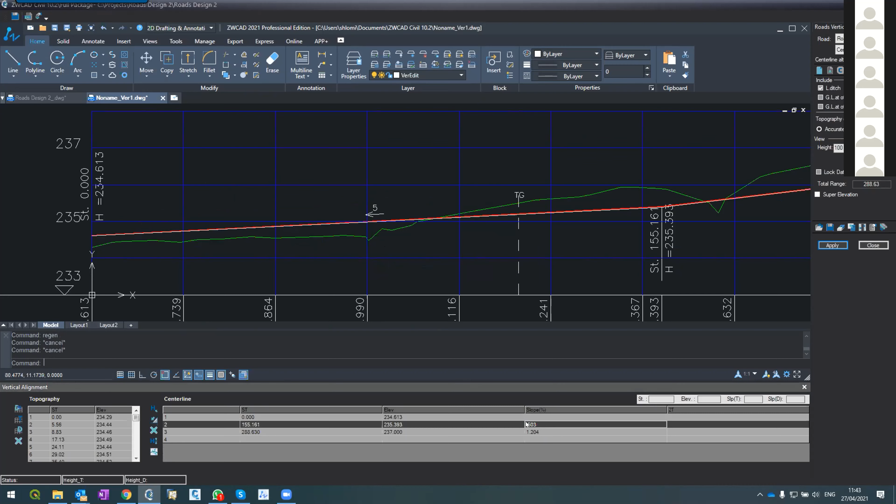The water can flow. I hope you got it. So how do I work? I work either with the drawing or with the list here. A common mistake is to work with both, and I want to show you something.

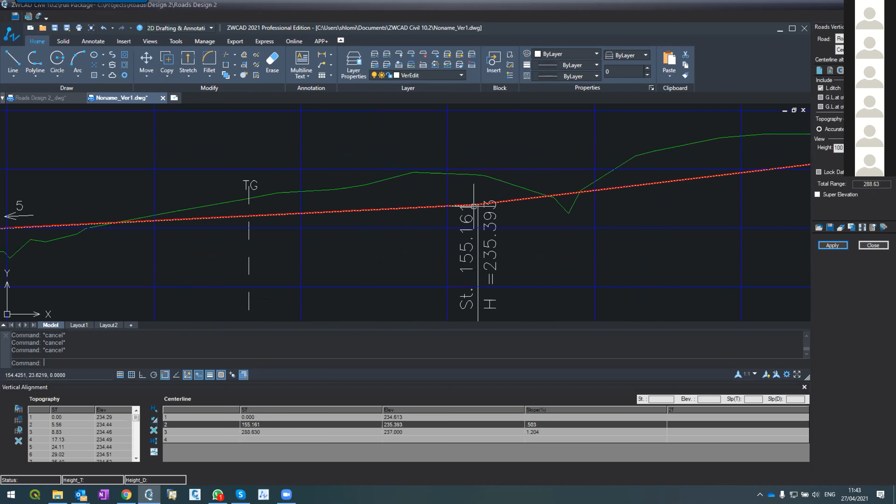I came here and changed it to here. If I apply, it will work, no problem—this will change and the data in the table changes too. But a common mistake is to do something like this.

Change this, say, let's remove the object snap here, and not press apply, not apply the change, and then change here. I will change something else here, let's say make it 1.6%. If I press apply now, the system will not know what to do, because it might create a conflict between what we drew and what we entered.

So the resolution will always be that the data in the table overrides the data in the drawing. So press apply now, you'll see that the system will not change—you see, it left the vertex here. Again, if we change the drawing and change the table and apply, the system will always overwrite the table on top of the drawing.

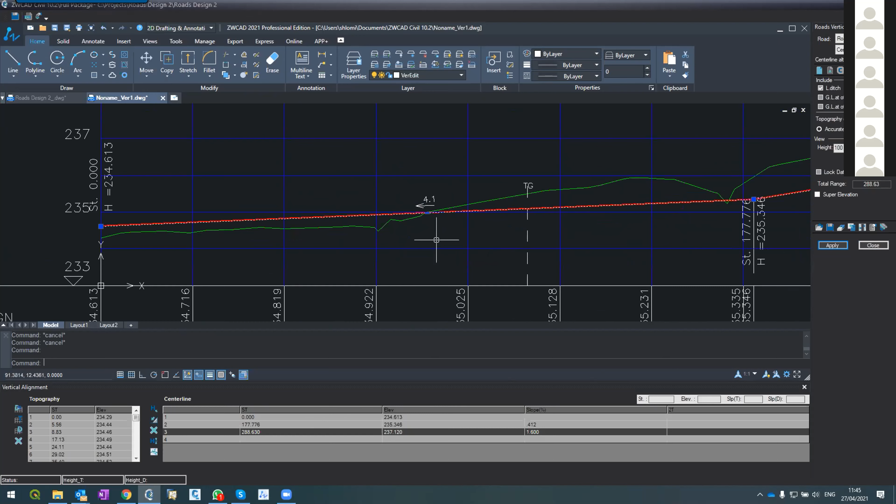What is the way forward, or what is the way to solve it? Every time you do a change, if you do a change in the drawing, you do your change, you press apply, your effect changes. You do a change in the table, you press apply, your effect changes. This is the method—not together. So every time you do a change, you can do many changes. I can, for example, break it now, or let me show you.

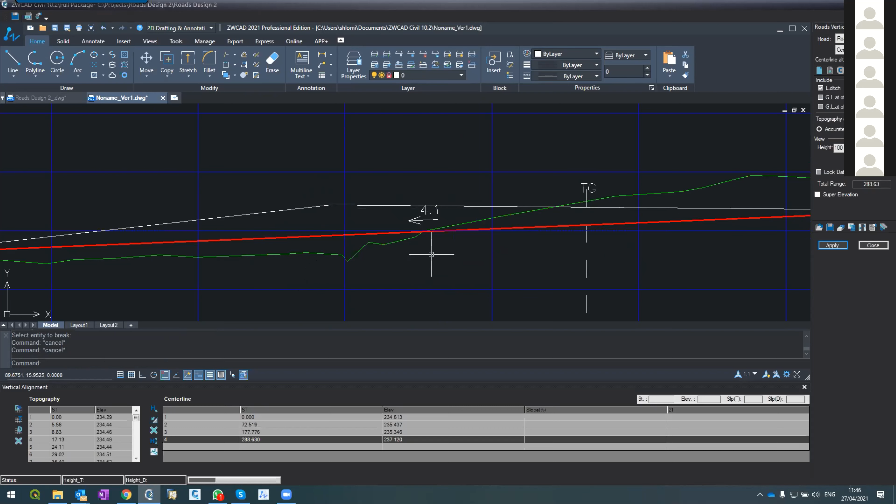Okay, this is what I want to do. Create another point like this. I can do it, there's no problem. And press apply. And the software will do it, right? It's not a problem for the software.

And then if I want to change something in the table, I want to change this slope. You see, this is almost a straight slope, it says 0.86. I'm going into the table, change it to 0 minus 3, and press apply. So now it will go lower. See, 0 minus 3, this is okay.

So we can work with the table and the drawing, but whenever you do a change in the drawing, press apply to update the table. Whenever you do a change in the drawing, you can do several changes in the drawing. For example, I can take this down and take this up like this, two changes in the drawing, there's no problem. But if I want to change something in the table, no, first I will apply, then go and change in the table.

I hope this is clear. It's all about practicing. Now let's continue.

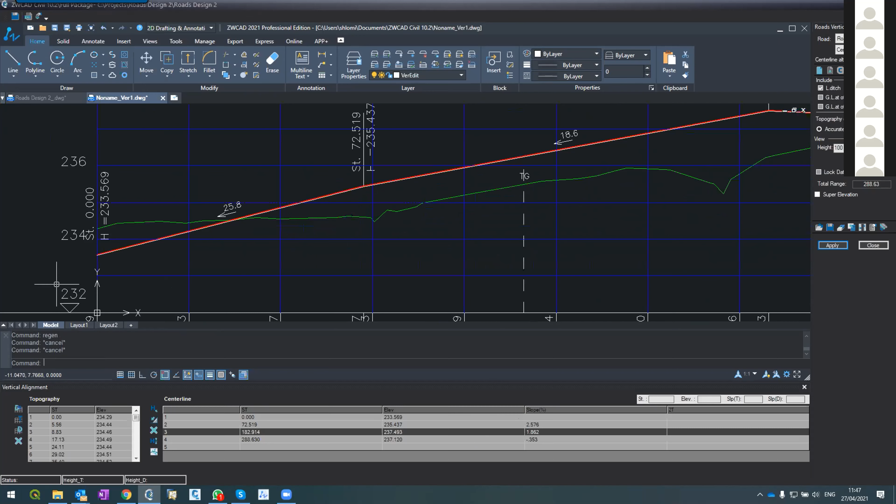Now the car will drive this way. Here there's a bump, right? So we have to enter a vertical curve. Here the bump definitely will be felt. No road can be like that. So we have to enter what we call also a radius here.

Now on vertical alignment, usually we don't enter radius, we enter the curve length. This is the more practical way. We want to tell the software the curve. Look, this is our 25 meters. Set the distance from here to here as 25 meters, right?

And from here to here is also 25 meters, so all of this is 50 meters. So I'm telling the software, create a curve from here to here, a total length of 50 meter vertical curve, and the software automatically converts it into radius. You will see it in a minute.

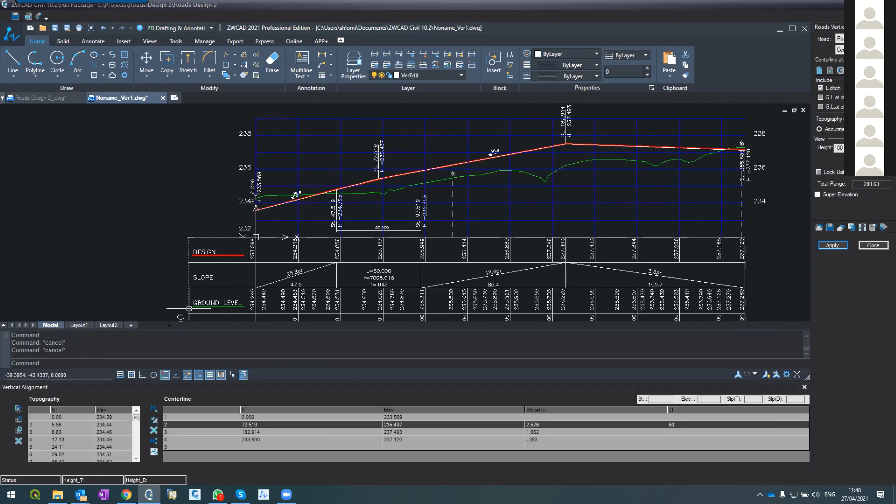You see what happened? The system automatically smoothed it into a radius. Actually it's a very big radius, 7,000 radius, it's very big. It's a circle of something like, I don't know, much bigger than this, something like this.

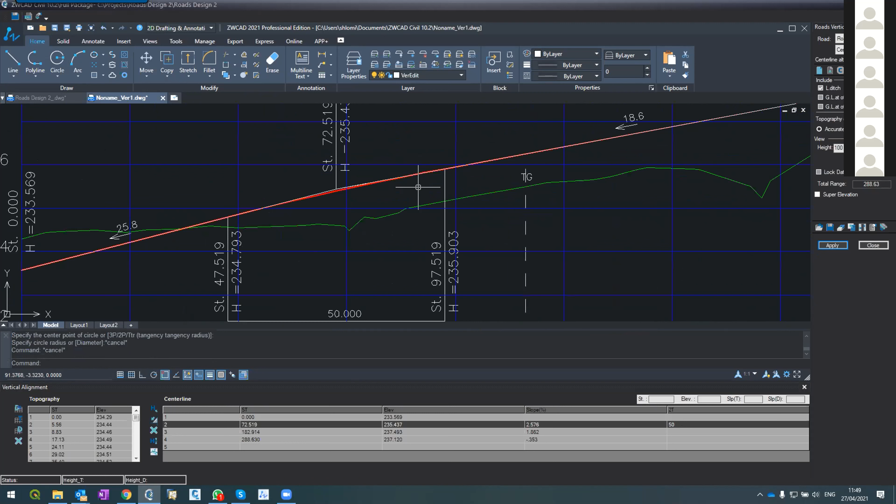And the same goes here, here also 50 meters. Here it is, we change it. Now there's no problem, we can continue.

If, for example, I want to change this from here to here, apply, it's not a problem, I can do it. It's a BIM, so everything is associated.

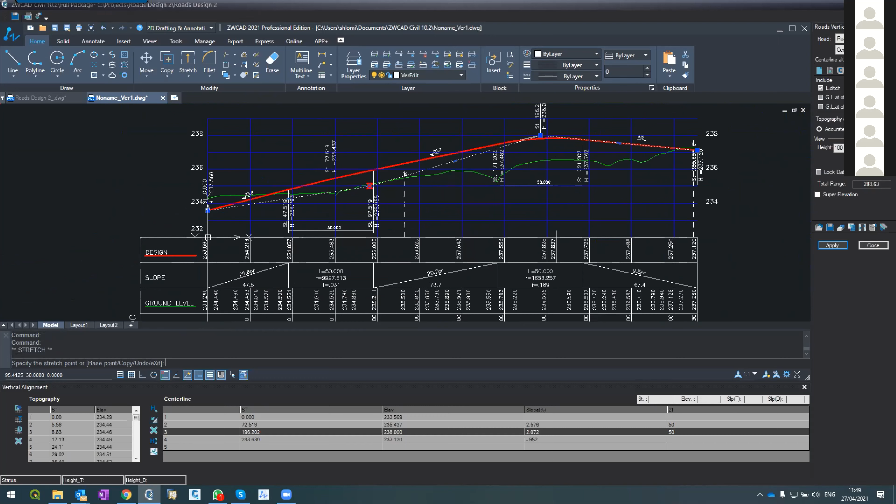Or if I want this to be below, like maybe cutting, for a certain reason I want to cut here, actually to stick the ground here. Press OK. There's no problem.

So this is the way to do it, and you can see that all the associated data appears here, appears here. I hope this is clear, I hope you got it.

So what I'm asking you to do is to take 5 minutes, do it by yourself, design your own road. Then I want to show you one last thing and we'll knock off for today. So please.

Hello, Shlomi. Yes. So I tried to reinstall the ZWCAD Civil. Okay. Before, the activation key that was given to me by Marina was working, but now it's not working. So let me share my screen.

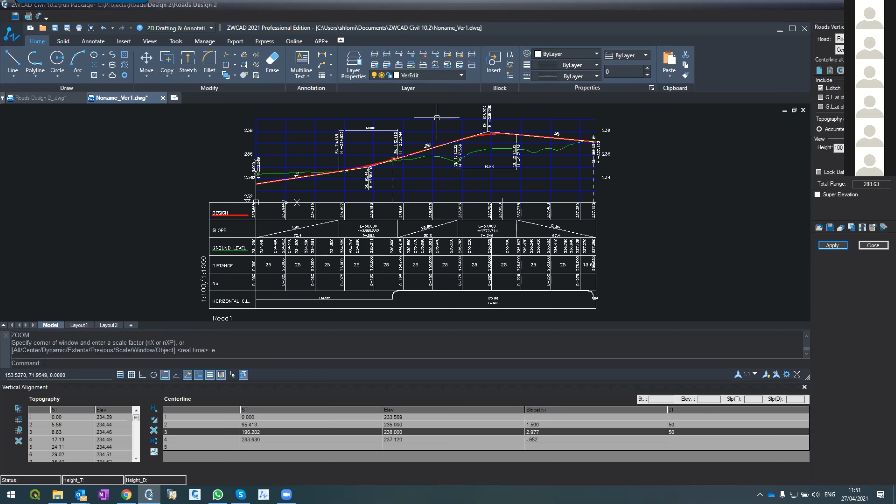Yeah, please go ahead, meanwhile the rest can practice. This one, one second, one second, I'm not seeing. Somehow, I don't know why, I'm not seeing the screen. One second, okay, maybe I have to stop sharing my own to see your screen. Yeah.

Yeah, but why did you reinstall the ZWCAD Civil? Because I cannot select ZWCAD 2021 as my working environment, so I downloaded the latest one that was uploaded last April, I think. This one. So I downloaded it, and with this one I can select ZWCAD 2021 as my working environment, and now I cannot use the activation key anymore. Okay, okay, yeah, I understand, I understand.

Okay Marina, please send it to him. I apologize. No problem, Marina please give him new keys. You already used this key. For the phone. Okay, that's why. You'll get one very soon. Thank you, thank you. No problem. The rest of you, please.